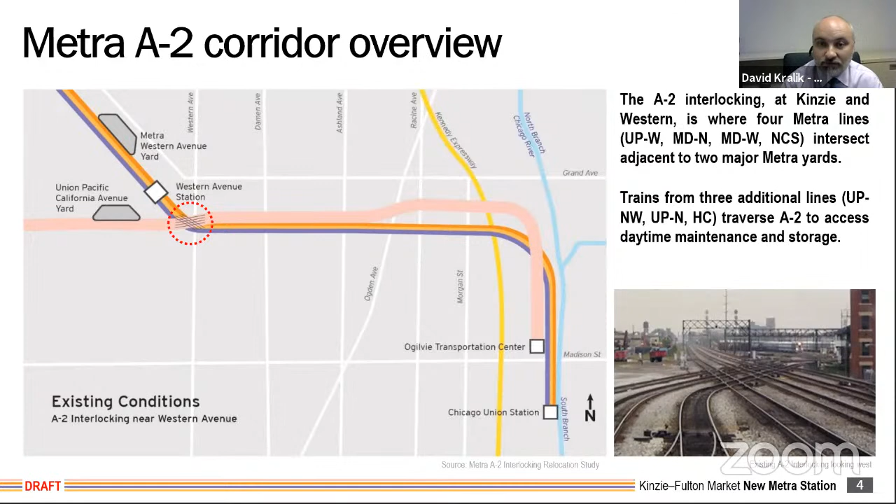A2 is the railroad name given to the crossing where the UP West tracks cross the Milwaukee District North and West lines and the North Central Service tracks, right around and on top of the bridge over Western Avenue. The map on this slide shows those lines, and the photo at the bottom corner is a view of the crossing looking west. In addition to the 4 Metra lines that operate through A2 in revenue service, trains from 3 additional Metra lines cross through A2 to get to the maintenance facilities just west of the crossing, also highlighted on the map. In addition, there are 16 Amtrak trains to and from Milwaukee and Seattle that pass through here each day. So there's really a lot of activity going on. Next slide.

Unfortunately, all those trains passing through A2 have to take turns going through the crossing. It's a bit like having a 4-way stop sign in the middle of an expressway. Trains have to slow or stop near A2, which is built using switch equipment from the early part of the 20th century. Over half of Metra riders rely on trains that pass through this interlocking.

If it goes down at the wrong time, it can cripple Metra service. It's also particularly challenging to maintain in inclement weather, which adds reliability challenges. So as you might guess, we have some plans to try to improve this crossing and really remove this bottleneck.

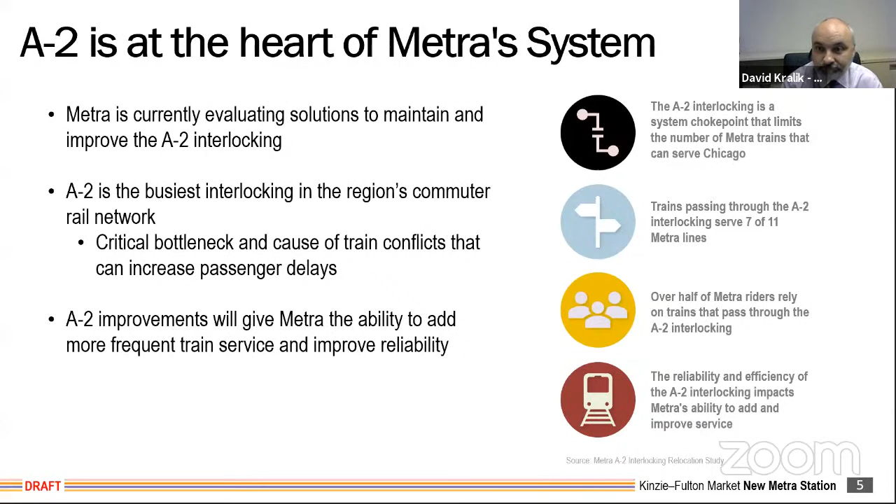To maintain service reliability for the 200 trains on 7 of Metra's 11 rail lines, and to allow for potential future service expansion, Metra is proposing improvements to this area.

This is necessary to create the capacity to stop trains at a new station within the area. Currently, there's not enough track capacity to add a station in this area. So a flyover must be built before or at the same time as a new station in order to facilitate station construction.

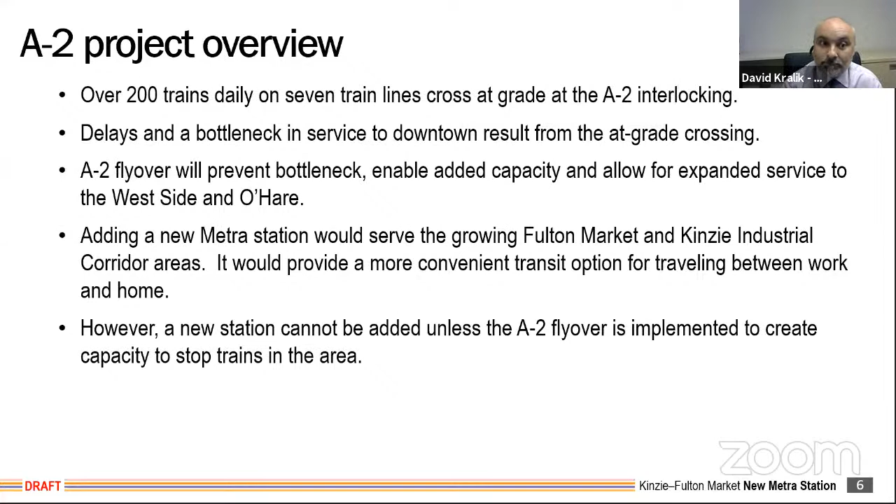We're currently completing early value engineering work along with operations modeling to help us find the most cost-effective solution for this project.

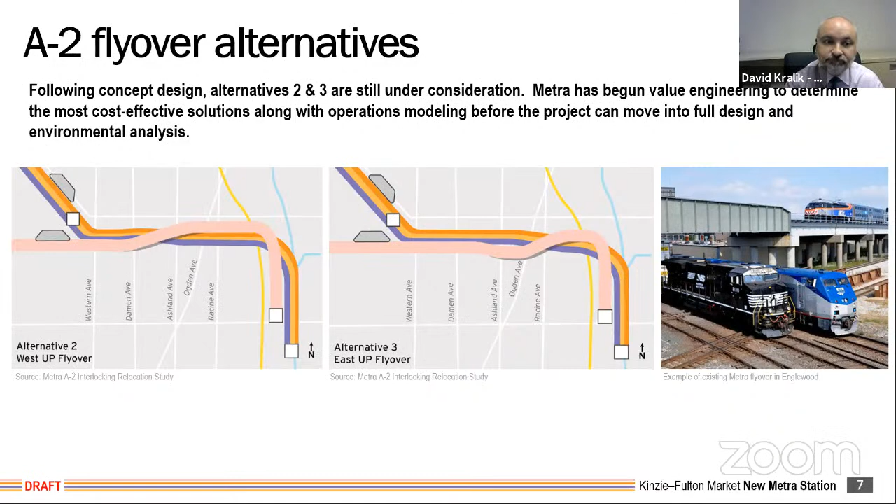While Metra has been exploring solutions at A2, the city of Chicago approached us regarding a potential new infill station to serve the Kinzie-Fulton Market area.

An infill station is one where Metra trains already operate but do not stop. As we've done for similar requests from other communities, we asked CDOT to hire a consultant to complete a station feasibility study to evaluate the merits of such a proposal.

We want to make sure that the analysis is data-driven and quantifiable, that it weighs the benefits to new riders against impacts to existing riders, and that it conforms to all of our standards regarding design, safety, and accessibility. CDOT agreed to initiate such a study with Metra as a key stakeholder.

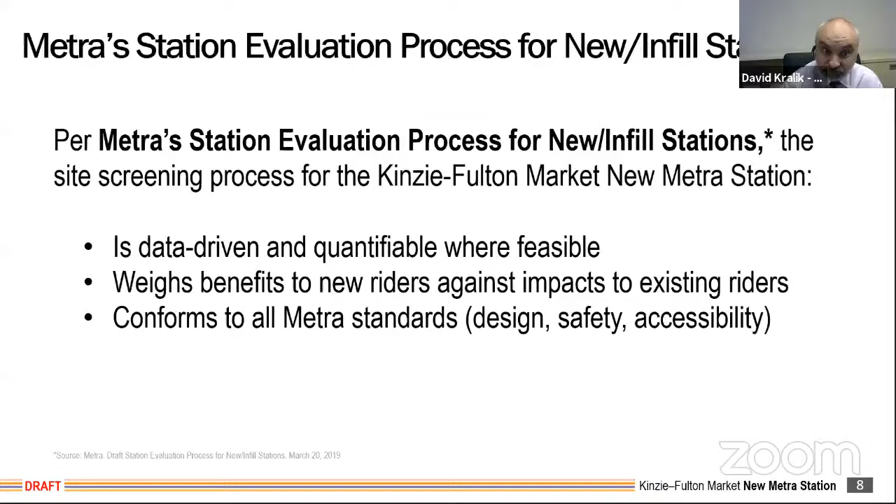And so at this point, I'll turn it back over to Jeff to walk through the results of the station feasibility analysis.

Thank you, David. So this evening, we'd like to explain what we've learned so far. This is an ongoing process, so it's not to say that this analysis is complete, but we've reached some preliminary conclusions and wanted to make sure we started the public outreach, which will be ongoing for many years related to this, but just based upon what we know so far. So that's what we'll be sharing tonight.

These lines then share a corridor coming into downtown from the west for about the last couple miles of the train journey. These train lines stretch out to the west side of Chicago, the northwest side of Chicago, and the northwest and west suburbs.

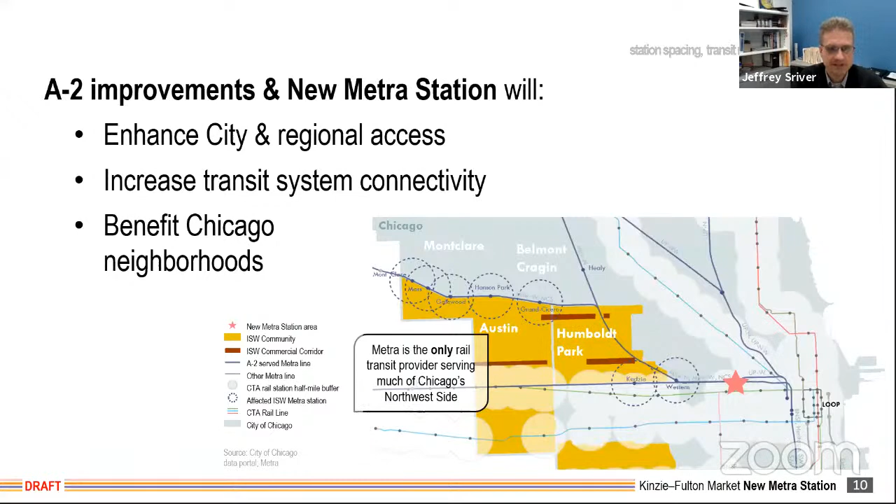Going back to what David was saying about Metra's framework for evaluating potential new stations, the city took a look at a travel market assessment to understand the nature of travel demand in this corridor, where all these lines come together and where we are contemplating putting a new station in the future. About four general site areas came out of that, which seemed to have good prospects to be a station, primarily because they were along the major cross streets that cross the tracks in this area.

So Damen on the west, Ashland towards the middle of the corridor, and Ogden going towards the east, and then Racine Avenue at the far east of the corridor. So those were the general areas that we have studied.

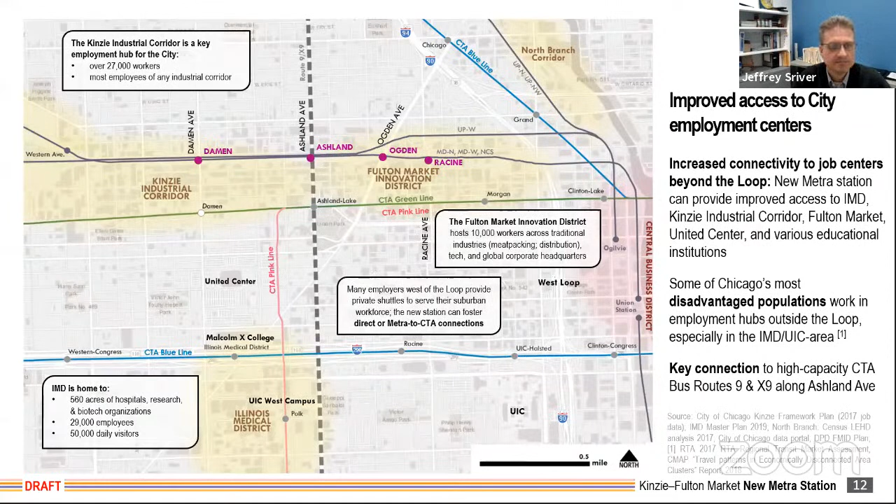That last image, and this image too, shows the relationship of this Metra corridor to the Green Line, just a few blocks to the south, and the Pink Line, which shares some tracks with the Green Line before branching off just west of Ashland Avenue.

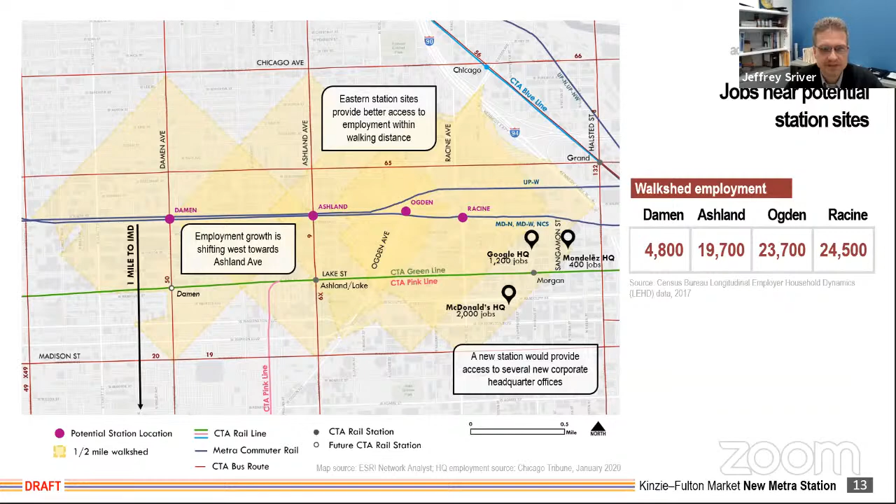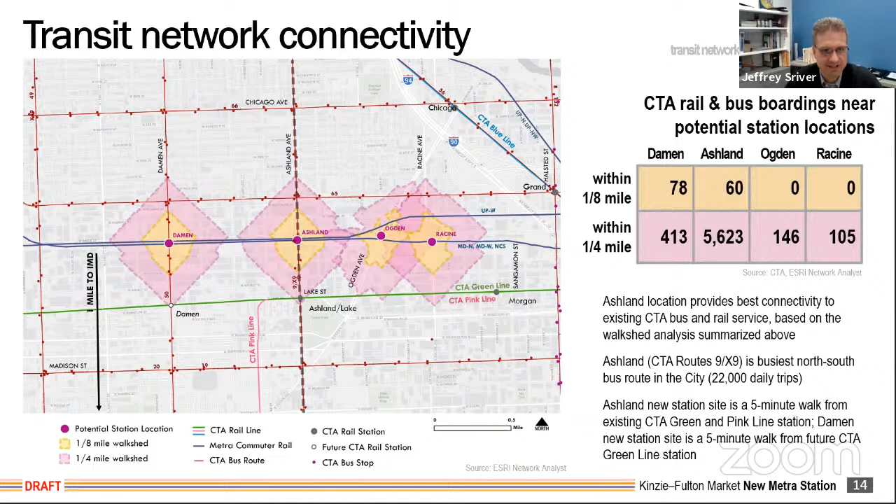So next we looked at some unique characteristics of one of the stations in particular. You recall that we had talked about how the Racine Avenue stop was closest to where the job concentration is right now. But Racine has some characteristics that are a bit different from the other 3 potential station sites.

One characteristic is that one of the Metra services that runs along this corridor, the UP West Line, actually branches off from the other 3 and is located about a block and a half north of the other 3 Metra services by the time you get to Racine Avenue. The other major characteristic is that those other 3 - the Milwaukee District West, Milwaukee District North, and North Central service - run on tracks that at Racine Avenue are at grade. So they're no longer up above the street level on a viaduct structure, but running right at grade and cross each of those streets there at grade.

What this means from an operational perspective is that if we were to put a station at grade at Racine Avenue, whenever the trains come in and stop, for safety reasons, the next 3 streets down the line - Racine, May, and Aberdeen - would have to have the gates down.

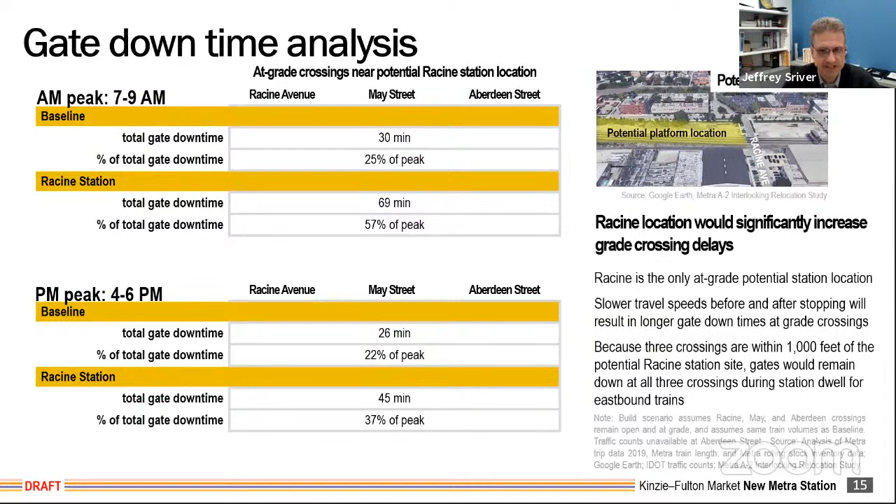Even in the PM, when the trains are going westbound, the gates down would increase from nearly a quarter of the time today to more than a third of the time with a station. Next slide, please.

With that baseline background information, we came up with a screening methodology looking at these 5 characteristics: travel market, multimodal network impacts, rail operations impacts, land use and development considerations leading into the travel market, and then implementation considerations - basically the constructability of the station. We screened the different locations with those criteria.

Again, this is to understand feasibility - mostly the technical feasibility, like really, is it possible to put a station here? And should we be doing more study here, or is this just not going to work at all technically, and it's not worth even thinking about anymore?

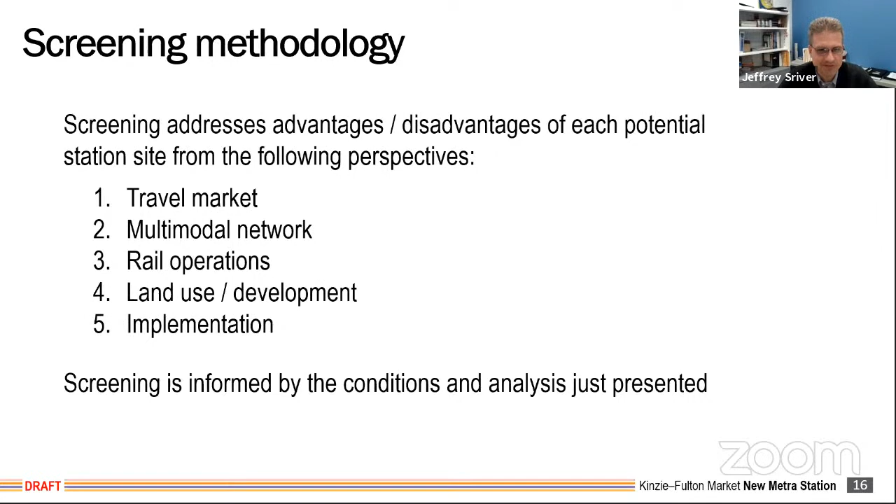Next slide, please. What we came to find out through this feasibility screening process is that Racine, as we saw, was fatally flawed, so we took that out of consideration. Damen could be feasible, but it didn't really score as highly on a lot of these characteristics as Ashland and Ogden did. We looked at both the west side and east side of Ashland, as well as Ogden, and those three locations really came to the top of the analysis, having the highest favorability in a lot of different categories that we looked at.

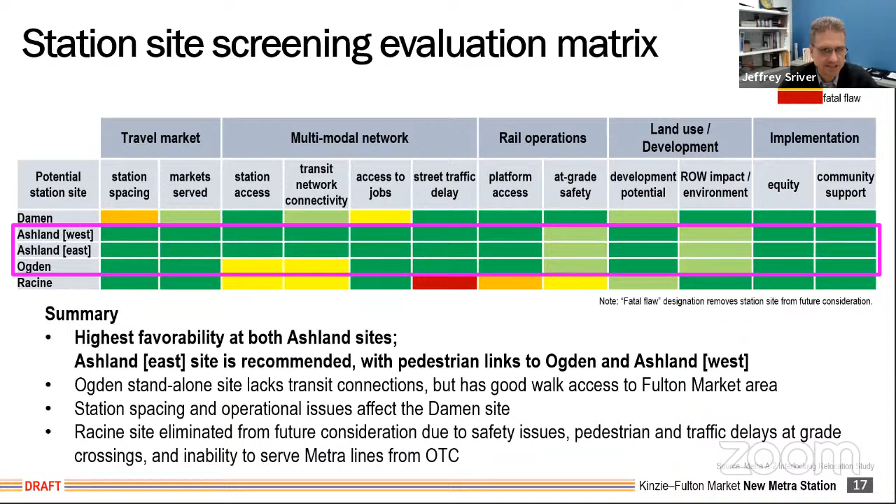Next slide, please. Based upon that analysis, we looked at the physical configurations of the site, or the physical characteristics of the site, and started to get a general sense of how a station might best leverage the fact that Ashland and Ogden are both desirable places to have station entrances.

Ashland and Ogden here at the railroad tracks are about 1,750 feet or so apart from one another. And the platform, a train platform itself, would be about 900 feet long - so a little over half of that distance in between it.

So the kind of working concept that we have now, based upon this analysis of feasibility, is that what we'd like to study further is essentially creating a station that would have platforms spanning most of the distance between Ogden and Ashland, with a walkway over to Ashland on both the east and west sides, since there are buses running on both sides of that busy street, plus another walkway leading people over to Ogden Avenue to points east.

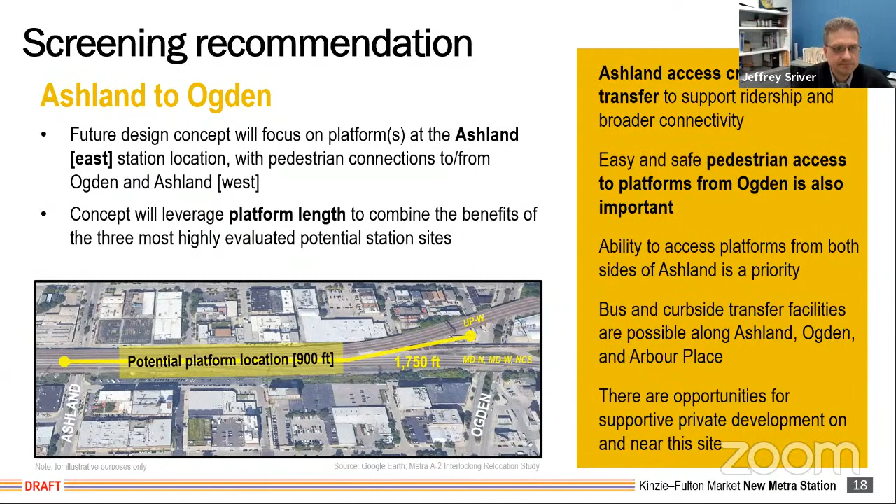Next slide, please. So this schematic illustration we created represents schematically how a station in this area could function. Obviously this would be subject to much more analysis in the years ahead, but it gives a general sense of how circulation might work around a station here.

The dark dashed blue line represents what could be essentially a pedestrian circulation concourse underneath the tracks that would be rebuilt as part of the A2 project that Metra described earlier, creating an open concourse for circulation running all the way from Ashland on the west to Ogden on the east.

The red dashed lines represent various intermediate points along this corridor that would have stairs, escalators, and/or elevators going up to the platform level from this concourse area, connecting these areas to the adjacent streets and sidewalks. These red areas would be the entry points into the station.

The blue lines represent streets that would have circulation for vehicles as well as pedestrians on the sidewalks and bike access too. The pink dashed lines represent what we're conceptually thinking could be more pedestrian circulation corridors, especially in narrow areas that wouldn't lend themselves well to street circulation, but could be enhanced for pedestrian use.

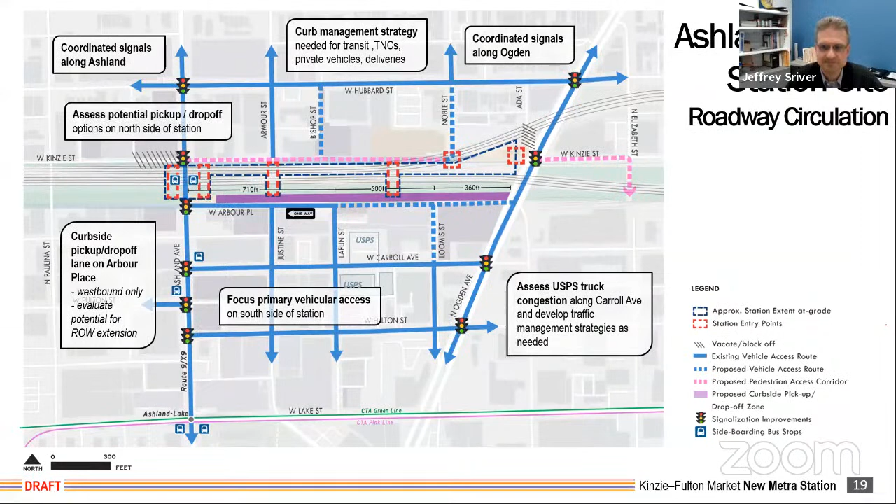Next slide, please. So with that overview, next we want to briefly talk about a potential timeline for doing a project like this. This would be a very, very large undertaking, both the A2 track project from Metra as well as adding a new station into this area, because of the number of tracks involved, the number of trains that come through here, and the type of infrastructure that would be required to support all of this.

This is not your garden variety new Metra station out in the suburbs, which isn't to diminish the importance of those stations, but those can be done with relatively less effort, usually just putting some platforms at grade next to the tracks. But here, this is all elevated and the tracks need to move around, so it's a lot more complicated.

It's in the middle of a densely built up area, and there will need to be a lot of community and public consultation as part of the process of figuring out where the station needs to be, what all the details ought to be, how to respect the interests of the properties around here, and the ability to improve the area and support the future development and needs of the city and region. So this is going to take quite a bit of time.

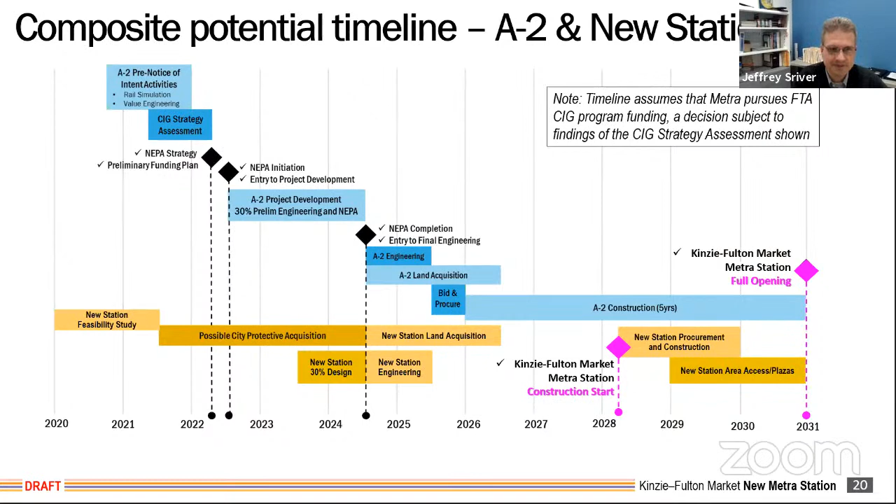Next slide, please. When we spoke about how much funding would have to be identified for a project like this, this slide is sort of the punchline. Metra's project alone, to rebuild all of these tracks and separate them so the trains are no longer delaying one another when they have to cross each other's paths, is more than a $1 billion project in and of itself.

It's extraordinarily complicated, especially when you have an environment where all these trains need to continue passing through this area while the project is being built. That means it needs to be built in a lot of different stages, which lengthens the time it takes and adds a lot of complexity. But that's just the nature of doing infrastructure in an urban environment under traffic.

The A2 flyover project would then be built in a way that would accommodate the new station, so there's a little more flexibility on the station side. Some of that $400 to $500 million - again, a very early preliminary estimate of how much the station would cost - would have to be spent at the same time the A2 flyover is getting built, so that it would have the right foundations, supports, and infrastructure in place to serve the station. That has to be built at the same time as the tracks, because you couldn't come in and do it later - it would be a lot more expensive to change things around after the new tracks are built.

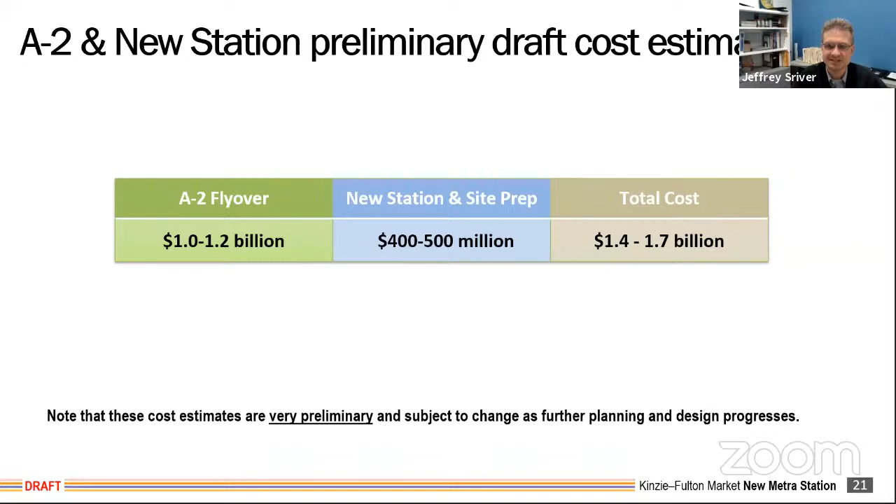So with that, one more slide here, just kind of talking about the next steps, which are alluded to on that schedule slide. As Metra mentioned, they are right now doing an early stage value engineering. Oftentimes value engineering comes at the end of project design. Here we're still in very preliminary conceptual design, but even at this stage, trying to figure out the most cost-effective ways to do this track separation project.

And then we need to understand what sorts of federal funding programs this might be eligible for, and what kinds of requirements they have, and how do we start lining up funding to do more detailed planning, environmental review, and community engagement on making this project real, and understanding what it's all going to mean. That's all part of that NEPA process.

And likewise with the station, it's a very similar process. One opportunity we do have is to try to see if any sort of property comes up for sale along here, or there's any potentially willing sellers of land that might be needed for the station, or for the new Arbor Place extension, or other public infrastructure that might be needed.